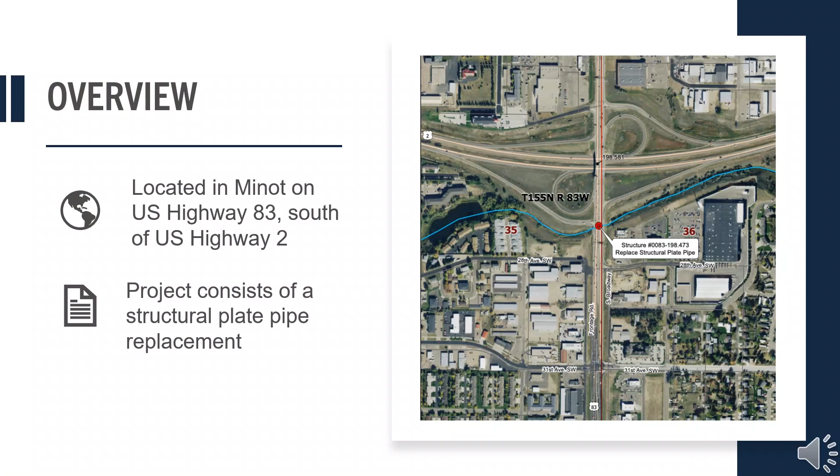So why is this project needed? Well, this structure is nearly 50 years old, having been constructed in 1976. Maintenance crews have attended to this structure numerous times over the last 10 years to extend useful life as long as possible. Unfortunately, at the most recent inspection in November of 2022, the culvert was given a condition rating of 3, which is poor condition. This rating, along with an extensive list of significant findings, have led to the decision to replace the entire structure.

Just to share some of the highlights of the significant findings, there is over 30 feet of culvert with rust holes and up to 2 feet of undermining in some places of the culvert. The seams of the structural plates and bolt holes are seeping, which is causing thick mineral deposits laden with dissolved iron. There are also multiple locations described as experiencing severe corrosion. But I digress. For the betterment of the traveling public on US 83 and to effectively maintain stream flow, it is critical that this structural plate pipe be replaced.

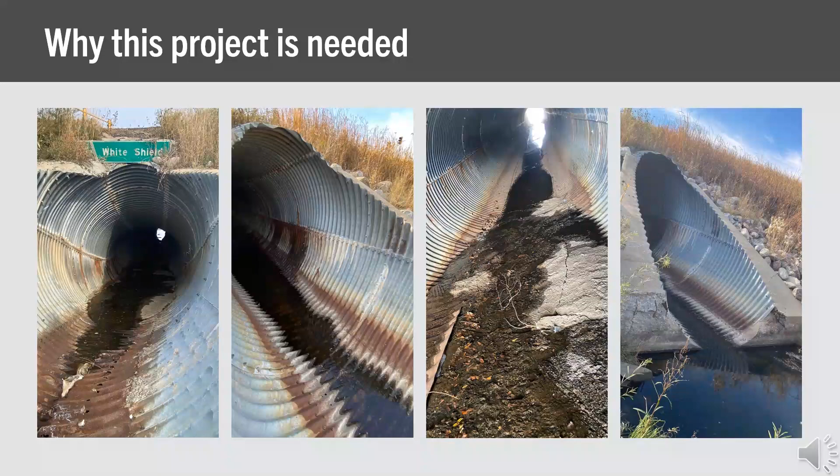Fortunately, we have some great alternatives for the proposed structure at this location. Since survey, hydraulic studies, and design are in the very early stages, I don't have any specific values to share at this time, but I can tell you we are still very much open to using concrete or steel to replace this structure. The current pipe has certainly served its purpose, and structural steel has come a long way in the last 50 years. So, depending on market availability, concrete and steel have become pretty comparable as far as life cycle costs.

Since we are dealing with a high traffic area and desiring to minimize construction time as much as possible, precast concrete becomes slightly more desirable, but current availability and lead time sways toward the benefit of structural steel. As we discuss later on, the construction of this project is currently slated to take place in the summer of 2026, so we will be keeping our finger on the pulse of market availability as we home in on the most cost-effective structure through the process of hydraulic analysis.

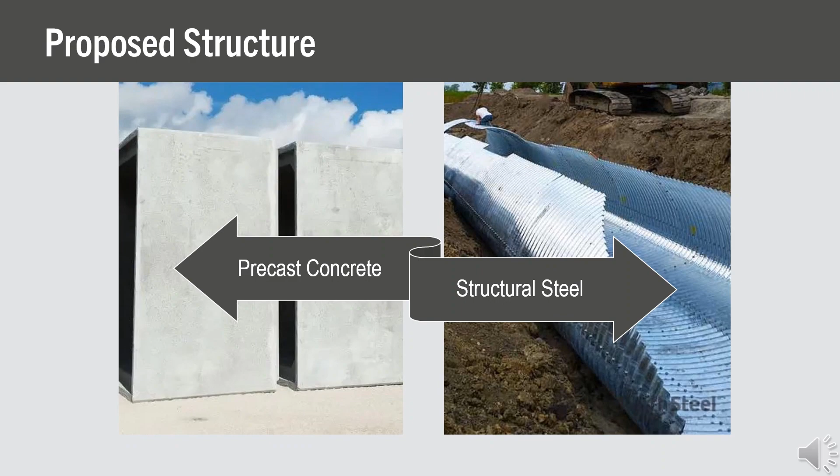The hydraulic analysis will be the driving factor in determining the appropriate size for the proposed structure in this location. A model will be created using survey information in combination with calculated values for peak design and stream flows. Several structure sizes and material types will be assessed with this model to pinpoint the most cost-effective structure that still provides adequate hydraulic capacity to maintain stream flow.

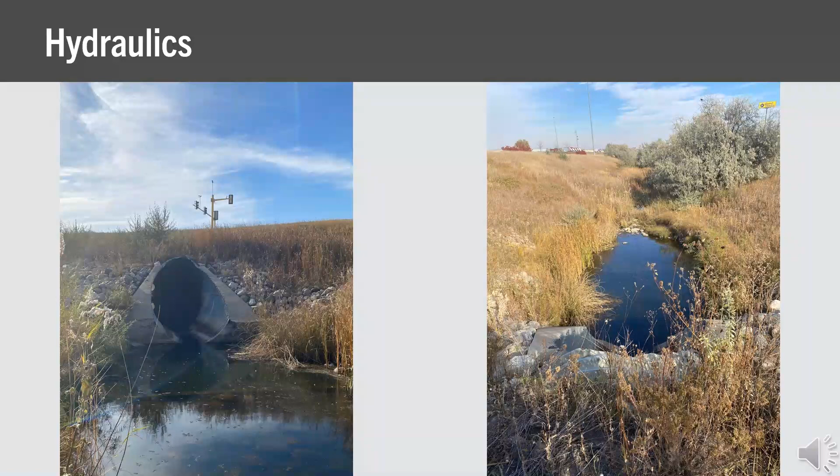Our approach to work zone traffic control for this project will be phased construction. This means we will shift traffic to one side of the highway to allow for a portion of the new structure to be placed, and flip-flop those activities to finish installation of the new structure. Finally, the corridor will be restored to existing conditions.

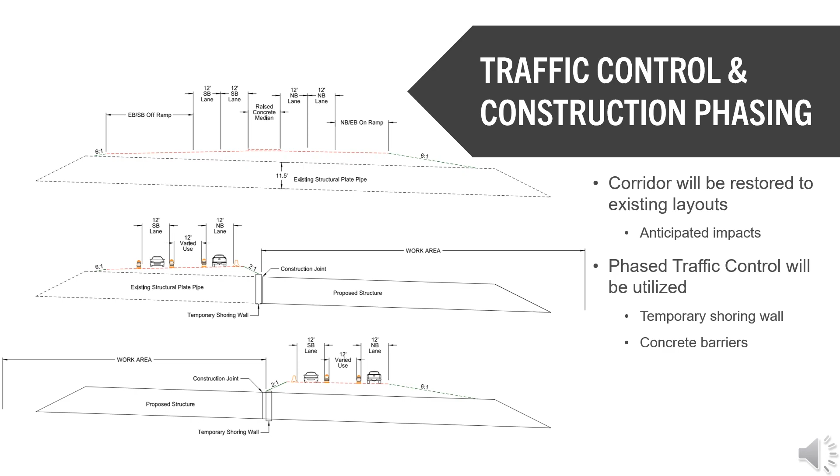Potential work zone traffic control layouts are shown on the screen. We hope to use this layout to maximize efficiency during construction. As shown in these details, Phase 1 shifts traffic to the west as work is being done on the east, and Phase 2 flip-flops the activities so that traffic is shifted to the east as work is being done on the west. Both phases allow for one lane of traffic in each direction, with comparable access to the exit and entrance ramps of US 2 as existing conditions provide.

Both of these potential phases utilize what is called a continuous green T intersection design so that the northbound US 83 lane will not need to stop at the ramps. This will be particularly helpful to reduce backups into the intersection that is about 300 feet south of this location. Any traffic headed north as they exit US 2 will still be controlled by a temporary signal, as will the southbound traffic on US 83. As we get further into the design process, traffic control plans will be assessed and an optimal layout will be finalized.

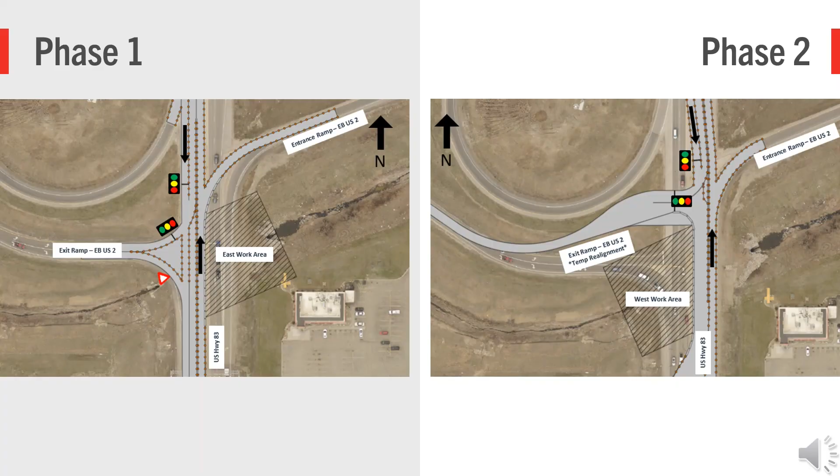There are multiple utilities within this portion of the US 83 corridor that will be affected by this project. A majority of the existing utilities are underground. No permanent utility impacts are anticipated, but utilities may be temporarily impacted due to the excavation necessary for installation of the new structure. The temporary impacts of these utilities will be communicated and countermeasures will be coordinated with the appropriate entities during the design process and throughout construction.

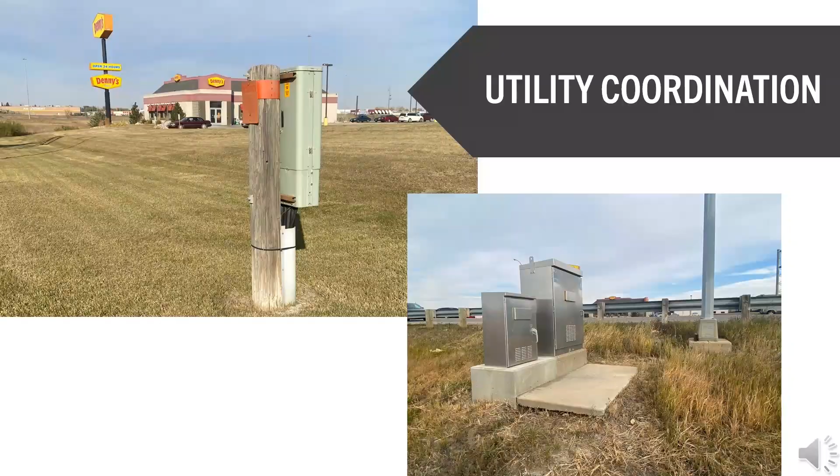Since a majority of the work being done for this project is under the current roadway and we are able to maintain traffic mostly within existing pavement sections, we do not anticipate acquisition of right-of-way to be necessary on this project. As we continue the design process, impacts of the replacement will be evaluated further, and if necessary, we will pursue a temporary easement for constructability purposes. With that, I'll hand it off to Nikki for some environmental information.

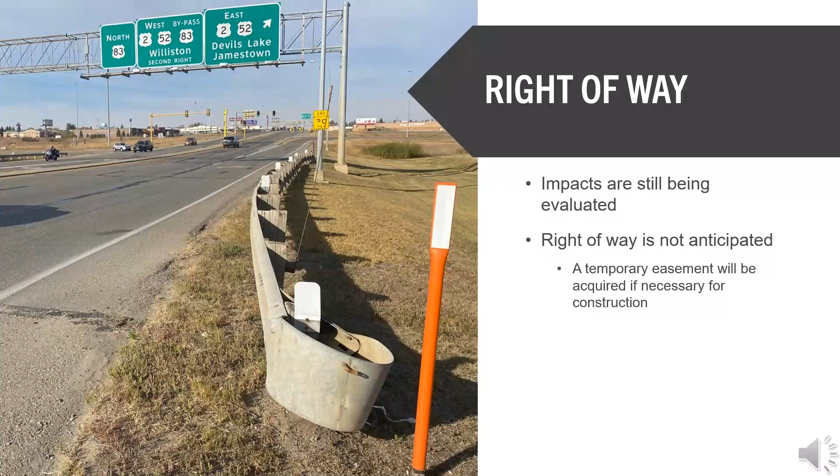Thank you, Mary. I will now discuss the environmental process, field studies, and permitting on the project. We are currently in the environmental process. Since the project is on a U.S. highway, the project must be developed in compliance with the National Environmental Policy Act, or NEPA. NEPA is a federal overarching procedural law that prescribes a number of required elements, including the development of purpose and need, public and agency involvement, and the analysis of alternatives. We want to hear the public's thoughts, comments, and suggestions to help us in developing the project as part of this process. An environmental document called the Documented Categorical Exclusion will be prepared. This document will analyze any anticipated environmental impacts as a result of the project.

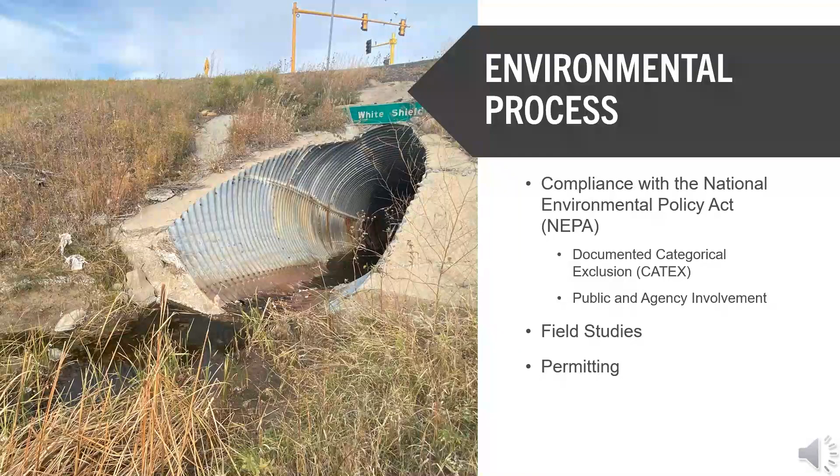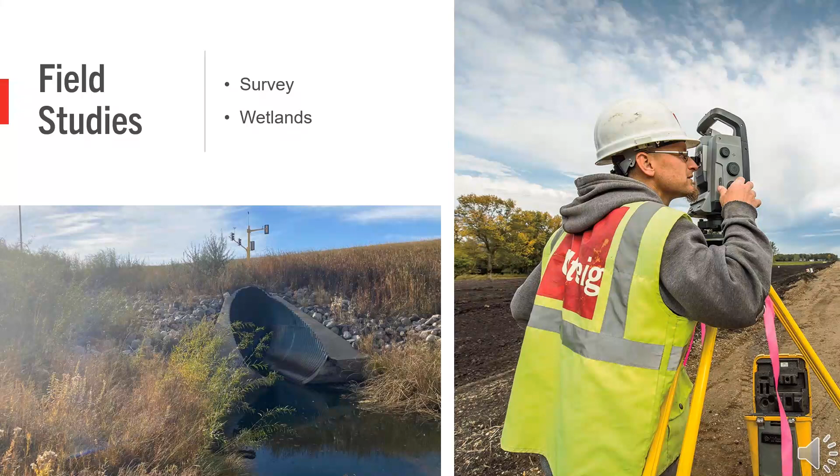To keep going on the topic of environmental compliance, several field studies will be conducted to determine baseline conditions within the study area that will then be used to assess and quantify impacts from the project. These include an aquatic resource delineation and a topographic survey. These surveys will be completed within the next month. A floodplain and wetlands are present within the study area. Permits for impacts to these resources are required. The permits include a floodplain permit acquired from the floodplain administrator and a Section 404 permit from the United States Army Corps of Engineers, or USACE, for wetland impacts. I will hand it back over to Mary to discuss the schedule.

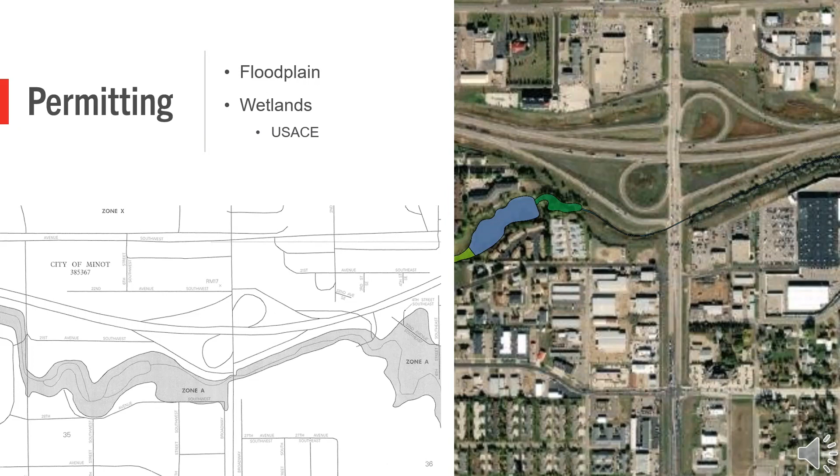Completing these plans in a timely manner will allow for competitive bidding among contractors and the ability to secure construction materials well in advance of the scheduled construction of this project in the summer of 2026. This schedule is subject to change, and any changes will be communicated to all stakeholders as soon as possible.